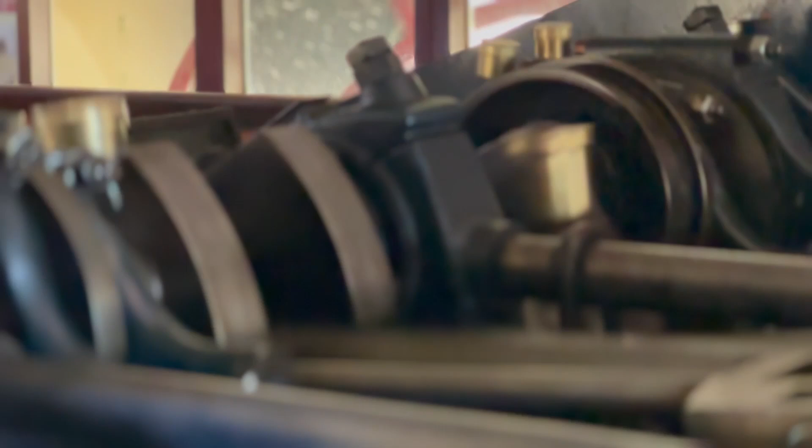Following on from the first part, I'm going to continue installing that center console. I've got the carpet kits, door cards, and we'll probably hang some panels as well. So we'll get into it.

Alright, I've installed and marked it out. I've got the bracket at the rear and the front. I've got the Bang Shift Aeroflow installed.

Now I've been debating with this, spoke to a few people, and they're like, why don't you just get a normal T-bar auto from the V8? Well, I wanted to do something different. It's all about trying some new things along the way.

Some people have said Aeroflow are called 'Aerofail' because they're not good, and you don't want to stuff around with your transmission. I've since found out that if it's in the wrong gear, you can stuff your whole transmission by having a ratchet that isn't popping it into gear accurately.

But I think as long as you set that up the correct way - these things have obviously, you know, they're selling, people are using them. They've got the right connector for the Turbo 350, which is going to pop it into gear accurately. So as long as you go through the gears properly beforehand, before you start it up and chuck it in gear, I don't see how it can cause too much of an issue.

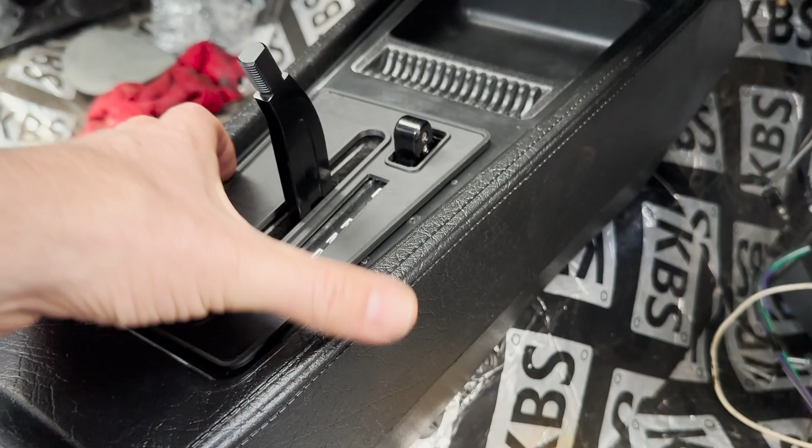If I can stick that down, that'll provide that reverse lockout switch to pop in. You can buy these extended billeted arms for these, so they're another 30 mil. If I get that and put that in, that will give me that extra access, because I can't get it sitting any higher than this - there's a spring underneath and it's just hitting the underside of this console.

So it's going to be a bit of a short shift, but being an auto, it's not the end of the world, I don't mind. A lot of the sports cars that you get end up getting a short shift put in anyway. So I think it looks good, I'm happy with it, and it's going to have to do.

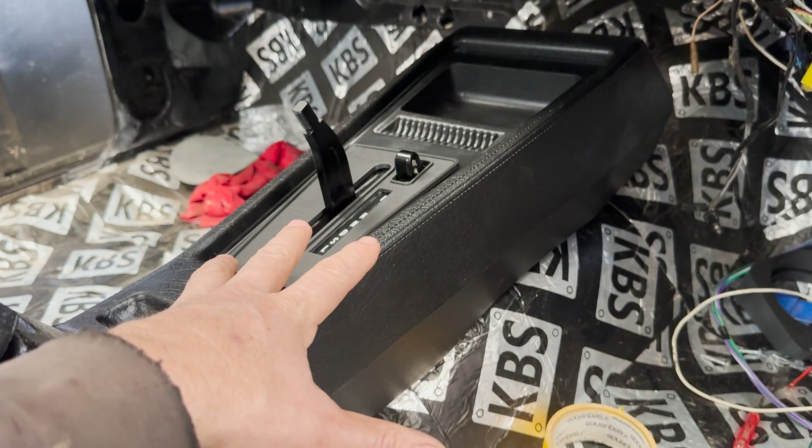So once that's in, I've got the carpet kit over there. Once it's in, the underlay and the carpet's going to lift it up slightly a bit as well. So it's going to be pretty short, but I think it'll be fine.

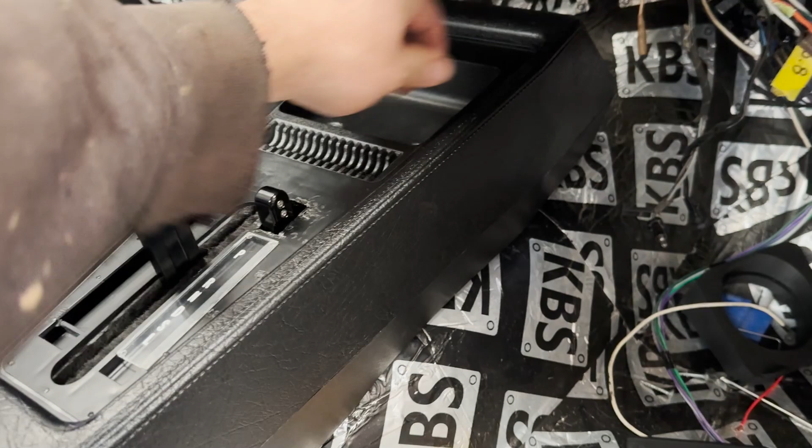So really I've just got to take this off now. It's been a bit of an arse of a job, actually. I've got to take that off, line it up, and then I'm going to have to tack weld all the brackets in and make sure it's all lined up correctly, because once it's tacked in, that's it.

So I'll take it off, mark it out. I'll have to grind some of this butyl rubber back, and then we'll tack it in.

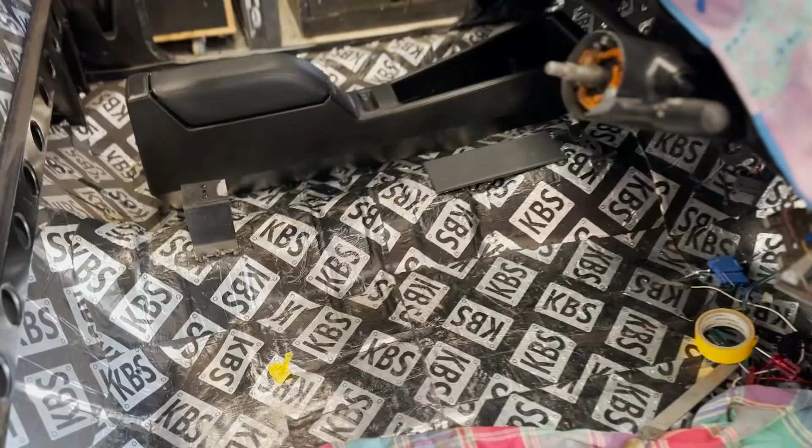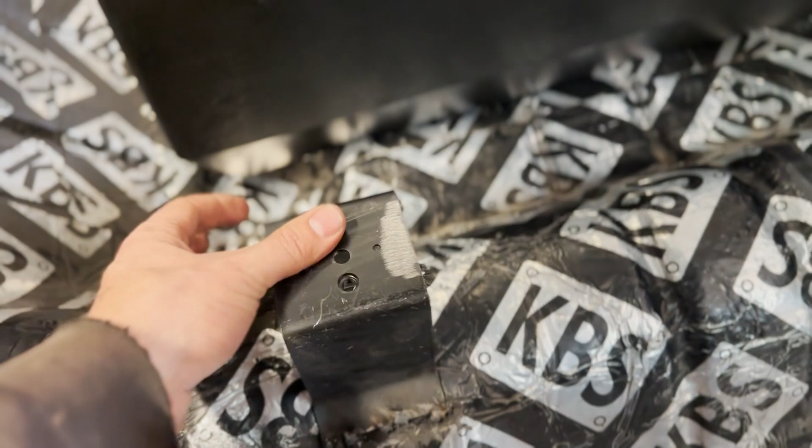Alright, bit of an update. So I've got the mounting bracket welded in the rear and at the front. It was really hard, a bit of an oversight - it was hard to get a good weld on those, so that's why they're a bit shit, but it's holding because of the butyl rubber. So if you're going to do that, don't put your butyl rubber on before you weld.

So anyway, the bracket that I ended up having is basically a sheet of steel - that's the clearance that I needed. It was literally just creating a bit of a flat bridge across that depression there, allowing clearance for the shifter on the console, and everything sort of lines up.

This cable's going to be interesting, going down there - it's going to be pretty tight. It'll fit. This plate is going to need some reinforcement down here, just like a little piece of vertical steel to drop down, just so it doesn't have any flex in it.

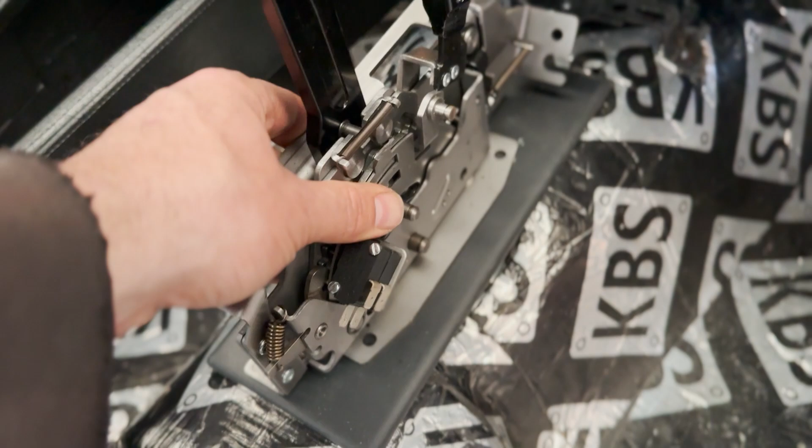And then really I'll just do a bit of a tack, tack that in, and that'll be enough. Then it's just a matter of alignment. So I'm pretty happy with the console alignment, it's got some wiggle room both back and forth, side to side there. This plate is pretty much where it's going to be as well. So I'm just going to fabricate up these side bits, and that'll be this job done. I'll be happy to get this over and done with.

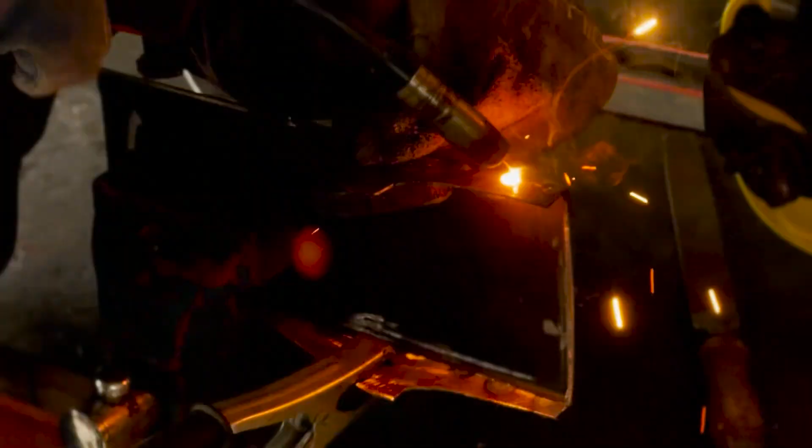All right, I've got that tacked in. I've got the sides tacked in, just seated it, and I'm pretty happy with that. I don't know exactly where that final position is going to be, but the plan was I'm going to riv nut through here and screw that directly on with Allen bolts. I think that should be enough, there's 3 there. So I'm pretty happy with that. The height is good on the console. Check that, these are all obviously in.

So really, all that's left now is just to tack those corners in. Then I can start to think about the carpet, which I have.

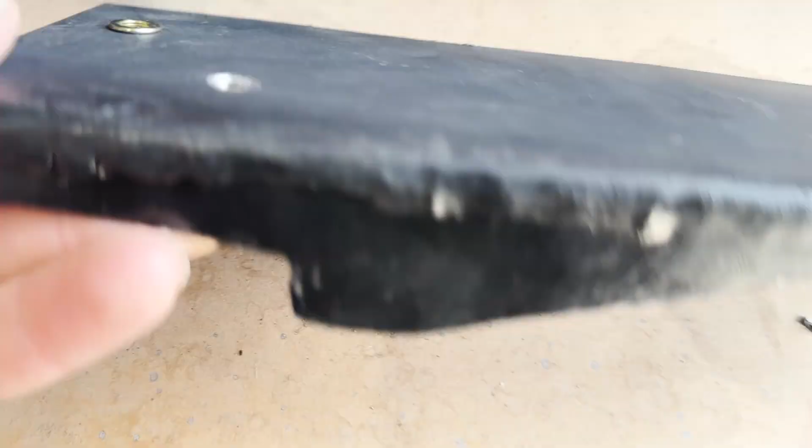All right, so off camera I've just welded those on, pretty rough. Got a riv nut, that's an M6 riv nut. Just got those 3 marked out. It's pretty good clearance underneath. And so I was just looking at getting the right bolts, and I've managed to find 3 of these.

I'll tell you what, this is my old grandfather's toolbox. And if you ever have the opportunity to get an old toolbox that someone's had for years and years, grab it. I got this when he passed away, I inherited this toolbox, and it has probably 40 years of little bits and bobs that he's come across, that he needed in all his shed work and everyday life. He's probably been dead 20 years, and I reckon he's saved me every year since, just for finding something.

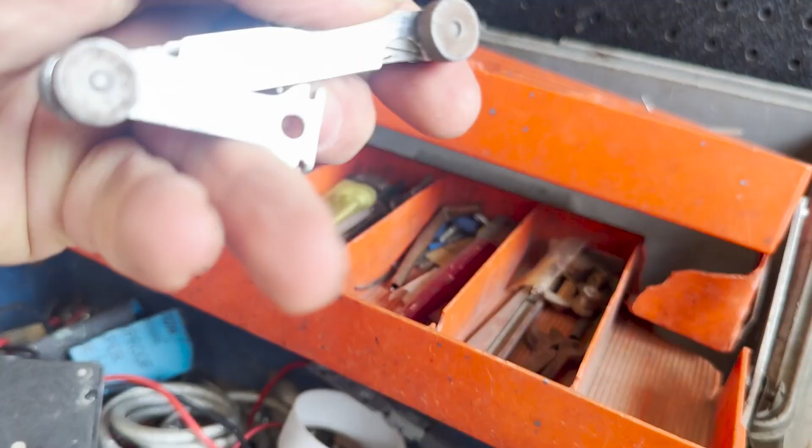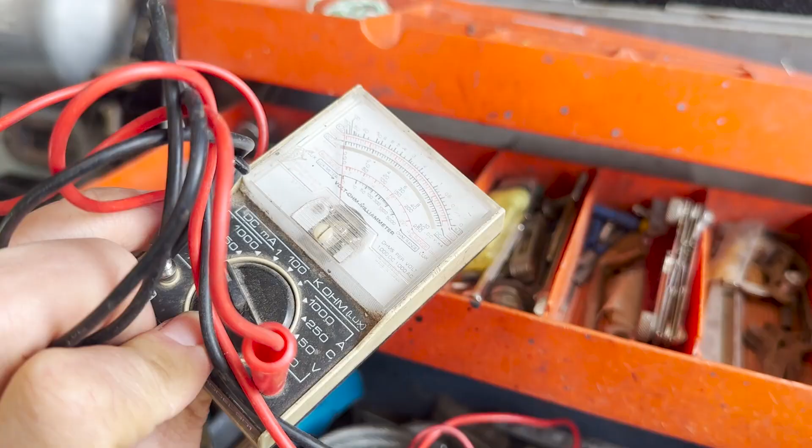It's got little things like this little tool, some German tool, the old school guys would know that, I don't know what it is. There's a little copper tube, he's obviously used that for something. He needs a lighter to heat something up, needs some wire. This isn't a hole punch or anything, it's off something totally different, but it's actually beautiful to punch holes in leather or mark out some tin. Don't know what that is, but I'm sure I could find a use for it if I stare at it long enough. Like this, just old school, but it still works.

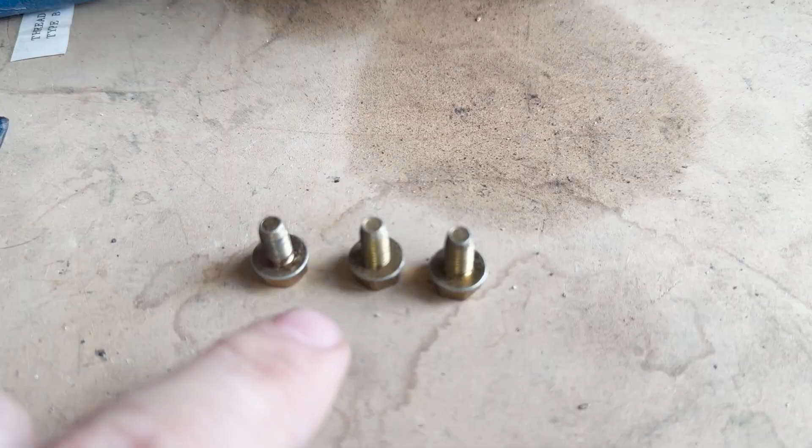He's probably getting a little bit carried away with this, but there's little tap threads, every single conceivable thing that's got him out of trouble before, he's popped in here, and I've just been reaping the benefits. I'm not too sure what's in there, but little nuts, little bolts, and he was a great craftsman, my old pa, and yeah, I was actually privileged to have this toolbox. So if you ever have an opportunity to grab one, because I can guarantee it'll save you every single time. In this case, the old man's nut and bolt toolbox has saved me.

So I've got 3 of them, I just need to find one more, and I'm struggling to find it. I reckon it'll be in there somewhere, and then I'll have a matching set. So anyway, I'm going to get the rest of these done, and let's install it.

All right, so she's all riv nutted, bolted in, both sides. Managed to find a different one in the end, couldn't find all 4 of the same bolts. Test fit it with the console. Heights are good and position's good, and the clearance is good at the top, so it's all good to go.

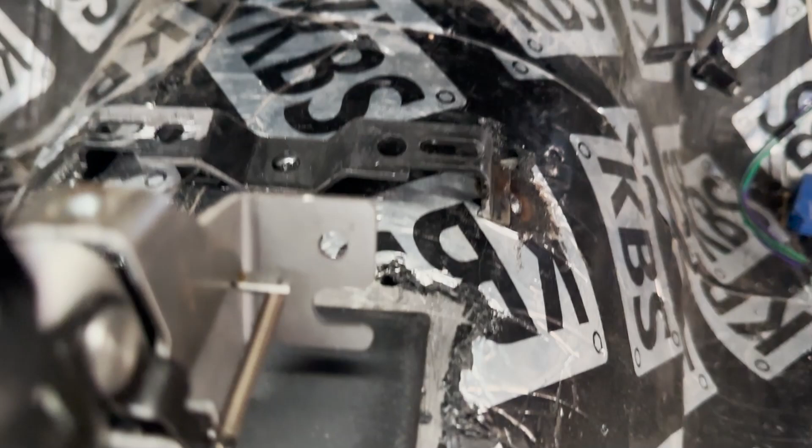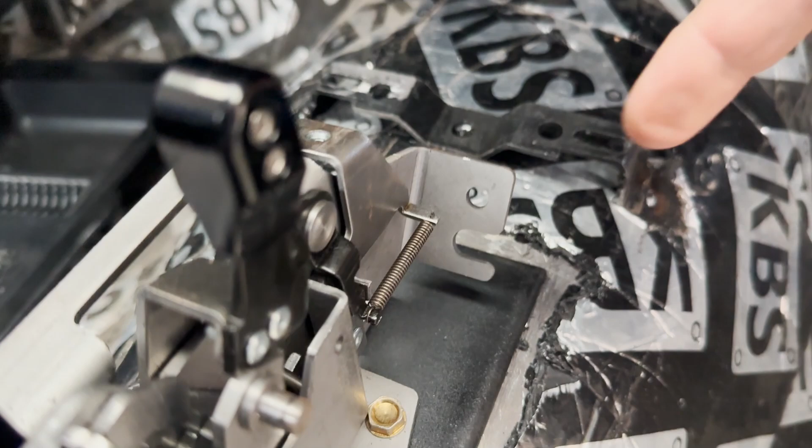So the next stage before I tack it in is to get this cable hole sorted. You can see it's pointing down, getting pretty close to that mounting bracket, but I think you can bend it slightly. Not a huge vicious bend, but you can certainly bend it a little bit. It is a flexible cable, so I'll get the documentation out on that in a bit, and we'll see what we're dealing with.

All right, so that's with the console in place. You can see the 2 holes line up there in the mount. Got a fair bit of sliding room there, back and forth, but the console really dictates, based on this shape here, and also the back where it hits there, where it should sit.

So even though you've got a bit of room to move, the body will show you where to put it. I've got my 3D printed case there that I'm just going to put over like that. That just really finishes it off.

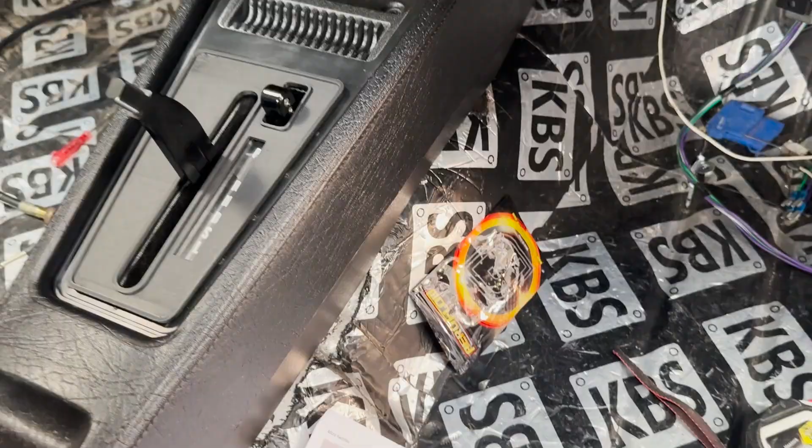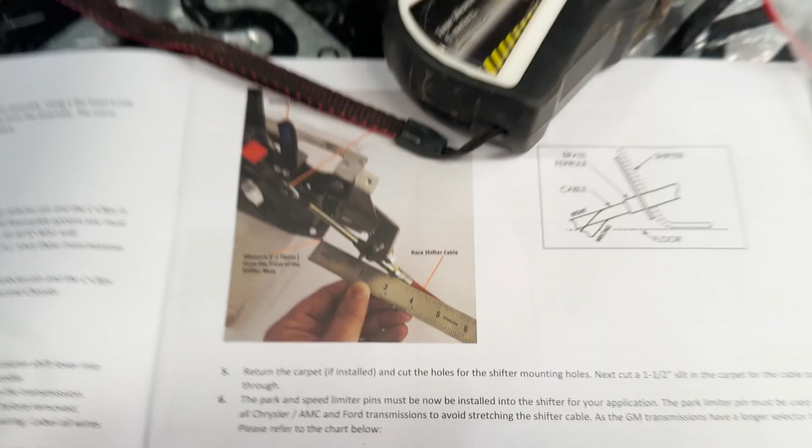Looks factory. So anyway, the documentation says you've got to drill a 1.5 inch diameter hole for the shifter cable, 3 inches from the base of the shifter. You can sort of see it there. So basically about 76 mil.

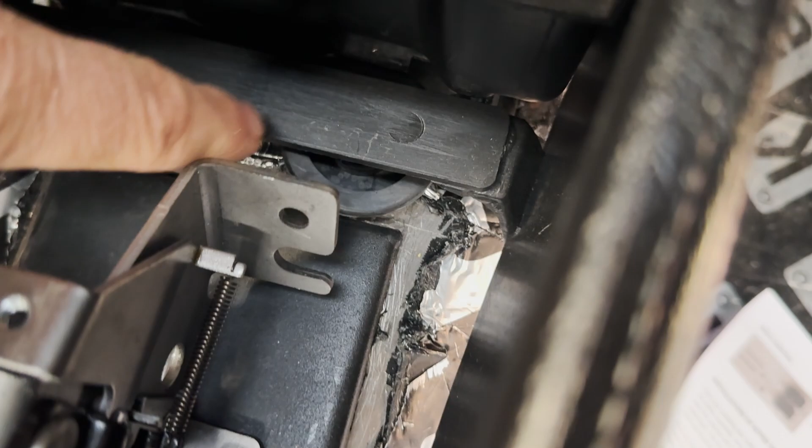And if I take this off, I'll show you how close we're talking. So you can see I've got a little grommet. It comes with this grommet, or bung, that'll allow you to put the cable in. And that's the cable there. It's a pretty hefty thing, but I guess it has to be. And that's the part that's going to be sitting on our shifter with this little clamp here.

So we've got this plastic bracket, stabilizing bracket on the console that's covering that, unfortunately. And that's pretty reasonably crucial, I'd imagine, to keep the whole thing structurally stable. Although it's not going to be holding a lot of weight, it's still nice to keep those structural bits if you can.

It is plastic though, so I think I can melt a little section out here to just get that clearance. I think that should be right, but it's really, really tight. Hang on, I'll show you with it removed.

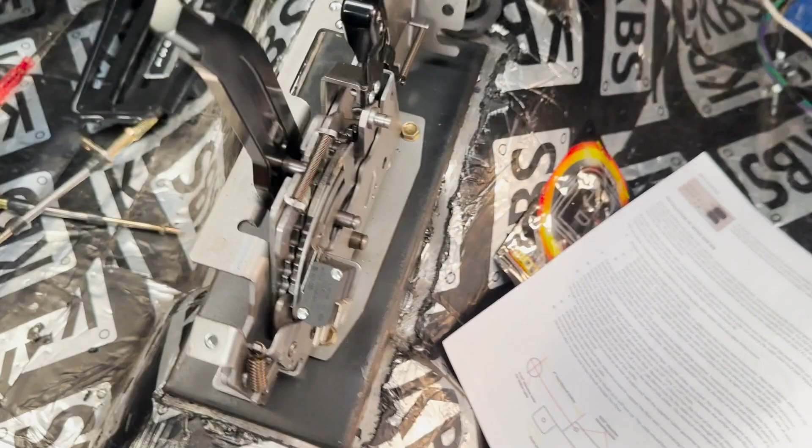All right, so here it is. You can sort of see that hole. It sort of lines up, but it is very, very tight.

It says 3 inches from the front of that plate there to where the hole needs to be, and that's 76 mil. So you can see I'm actually bang on, almost bang on. So I think it's going to work. I had to tack that in to get the console position in order to get that.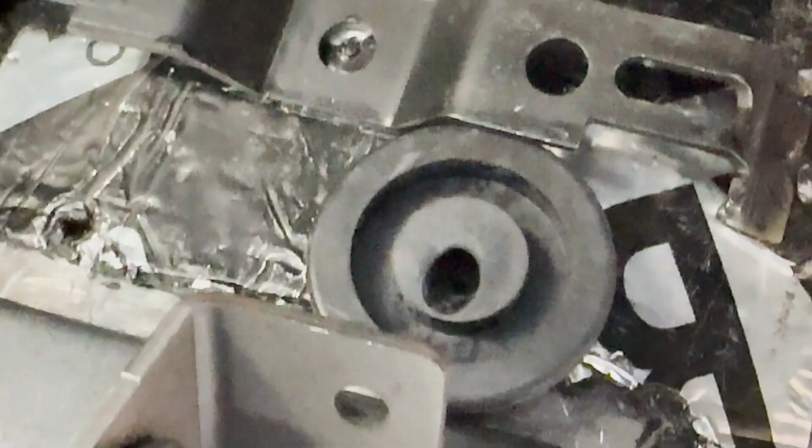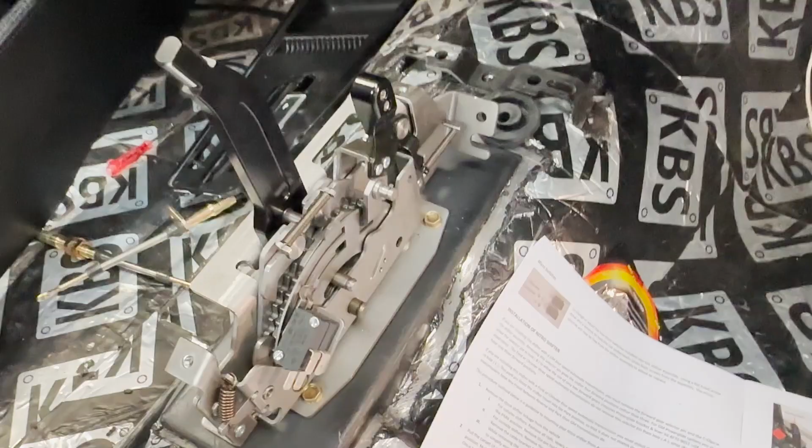She's been a fiddly job, but that's the bung there that needs to go in, and it's a 1.5 inch hole to drill. I've got the drill over there. I hate drilling big holes in cars, especially the floor. Anyway, I think really all that's left is to just drill the bloody thing and get it in. Then we can move forward with this, because as you know, it's been ages on this console. So I'm just going to go for it, drill it, and start getting this cable in.

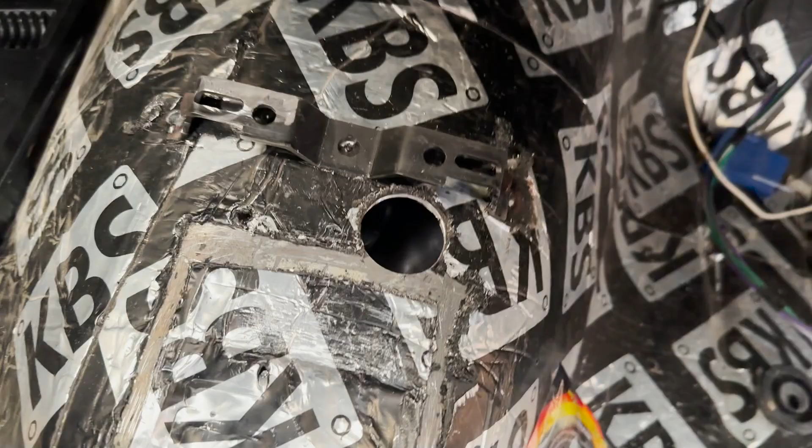All right, bit of documentation on this shifter. So I've got the bung in there. It goes on that bottom hole actually, so I reckon that's pretty good. It's actually looking pretty well placed.

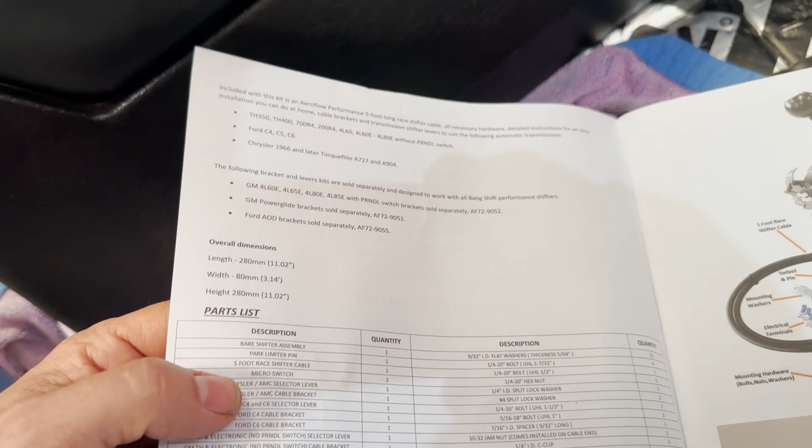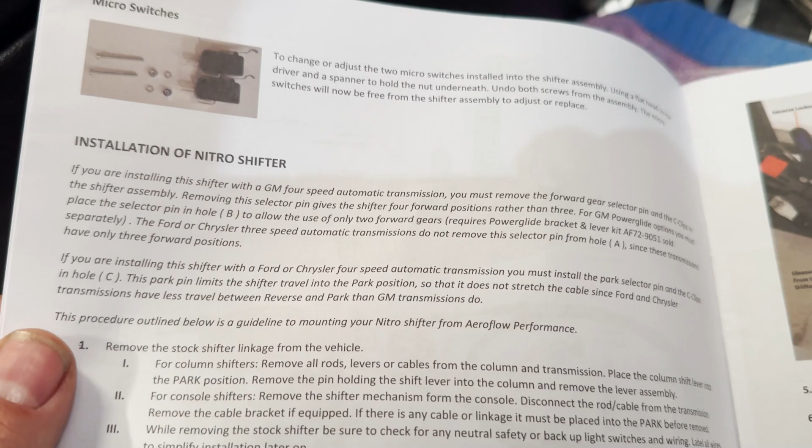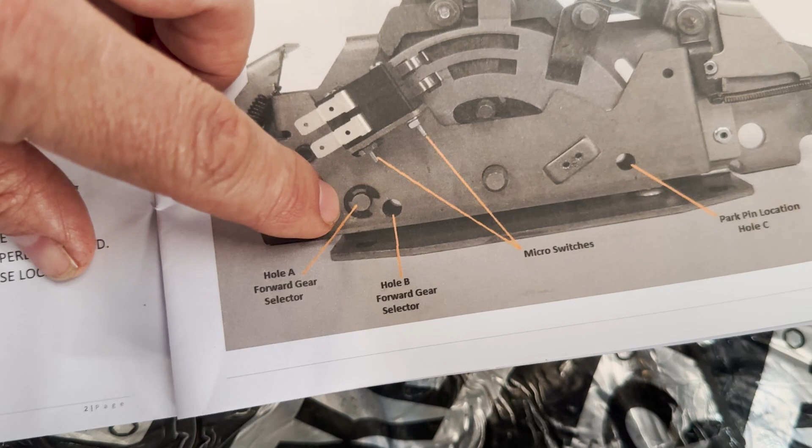So with these shifters, there are some things you need to do if you have different shifters, because it's a one kit fits all sort of thing. So basically, if you've got the GM 4-speed, you have to remove the forward gear selector pin, which is there, and put it in there, I think, or just remove it. And then if you've got Ford or Chrysler, you need to put the parking pin in there.

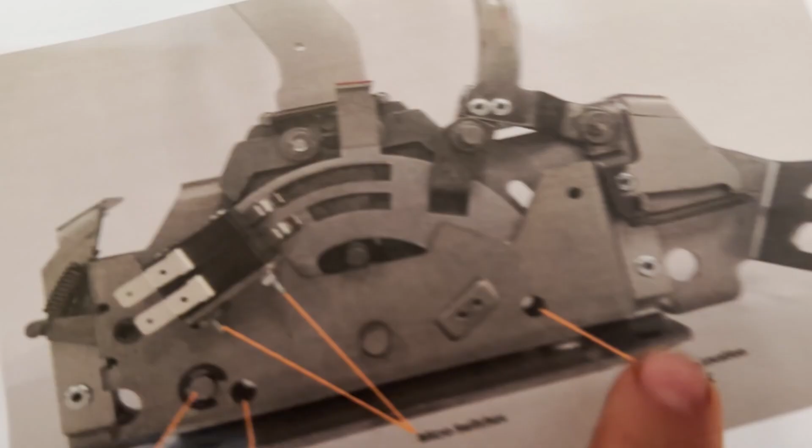So they provide you all these little goods in here. The parking pin is just there. They give you a C-clip with it. So you've got to put it in there because the GM has a slightly longer throw in the cable.

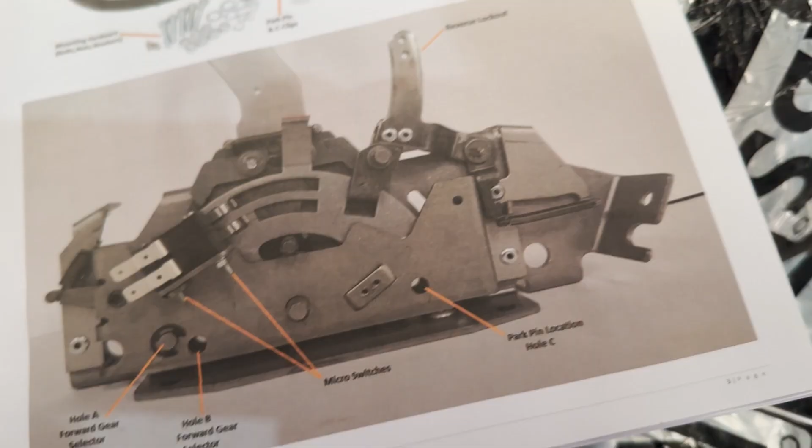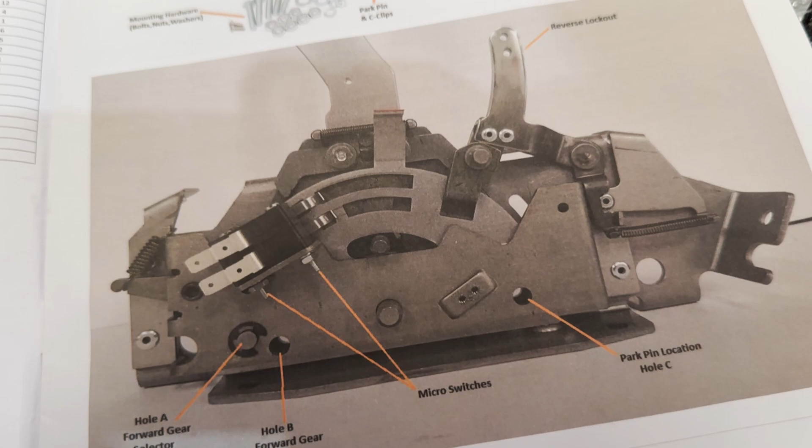So if you've got a 3-speed Turbo 350 like I have, then from what I can see here, you don't have to do anything, you just leave it. You have to ratchet twice to get from reverse to park because it is a longer distance. So if you only ratchet once, you won't be in park, and obviously the car will roll. That's not ideal, but that's just the way it is, and it does say it in the documentation.

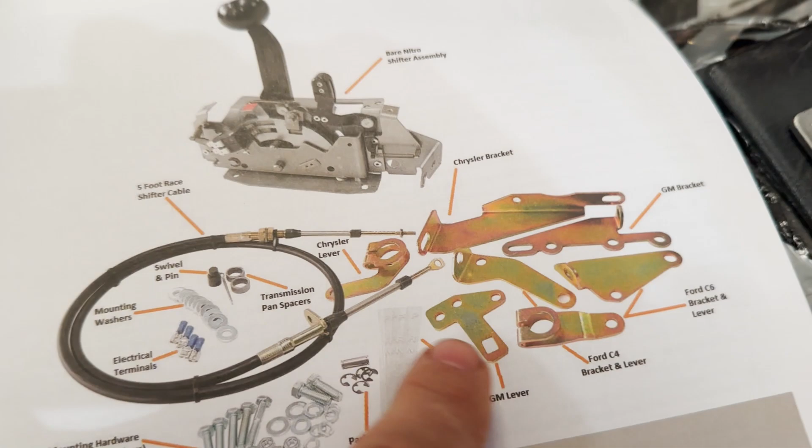So I'm going to leave it, and I'm just going to thread the cable in through the front there, see if we can get some fitment and testing it, and then I'll try and get underneath, because they give you all these brackets, and the one I want is the GM bracket and the GM lever for the Turbo 350. It's got that on the next page, but for now I'll just see if I can fit the cable.

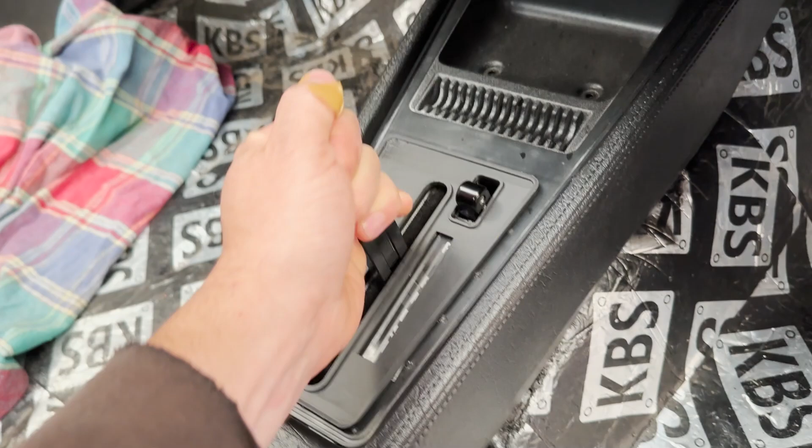So it's now welded in off camera, and I just did a test fit, so happy with that. Reverse lockout, it's working. And clearance, and park. She's all locked in.

mechanism that's going to talk to that little selector, the LED selector, which I've got to buy as well, and hook that in, but that can be at a later stage.

I just want to get this carpet in, the last seat, and then the carpet in. Before I do that, I need to just thread the cable. So I'm going to take all this apart now and tackle the cable, which looks to be a little bit of a nightmare because of the length. You have to sort of feed it around the transmission to get it lined up.

So it's in park, that's what it says, push it all the way to park, so we know it's in park. And when I put the cable on, we'll push the transmission into park as well. Then it's a matter of lining everything up, putting the bracket on for the GM Turbo 350, and that's it, bolt it up.

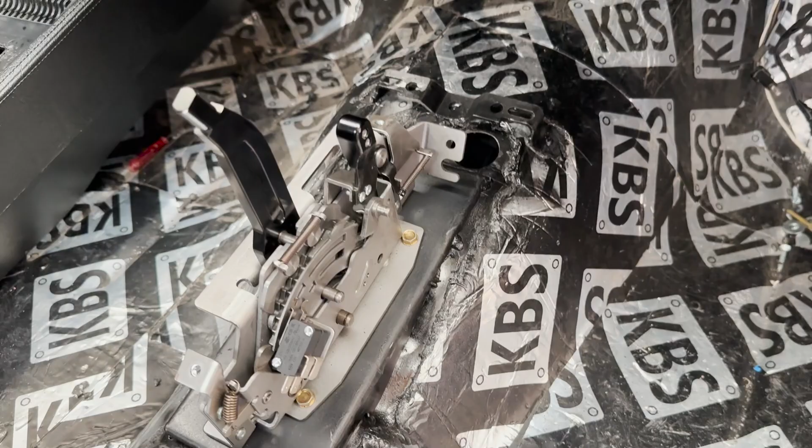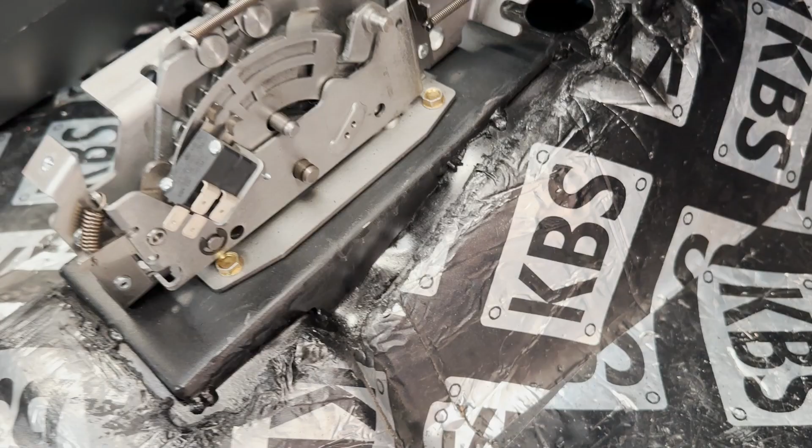So here we go. Oh, just quickly, I've just tack welded it in. Don't look at my welds too much. I didn't want to weld it in too heftily, didn't want to run beads or anything like that, so I've just done some reasonably hefty welds in the corners, on the sides. That thing's not going anywhere.

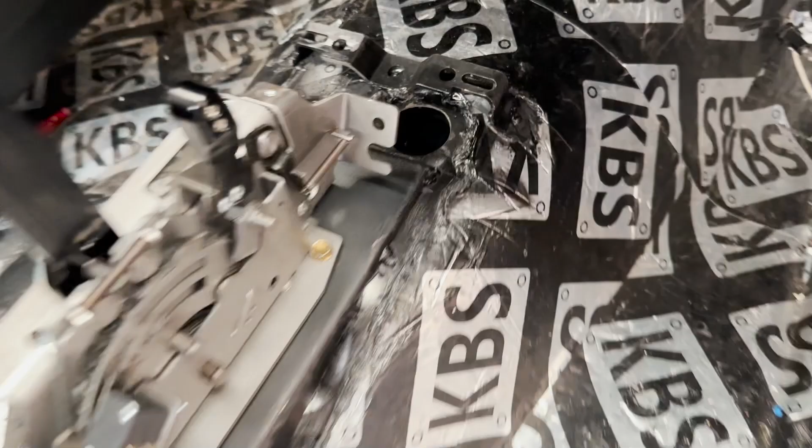For some reason you did need to remove it, but it's not going to be the end of the world just to grind off those welds. So everything's ready to go, it's lined up, as I said. The hole's there. Now I just need to get this cable, thread it in, and figure out how to position it so that I can hook it up.

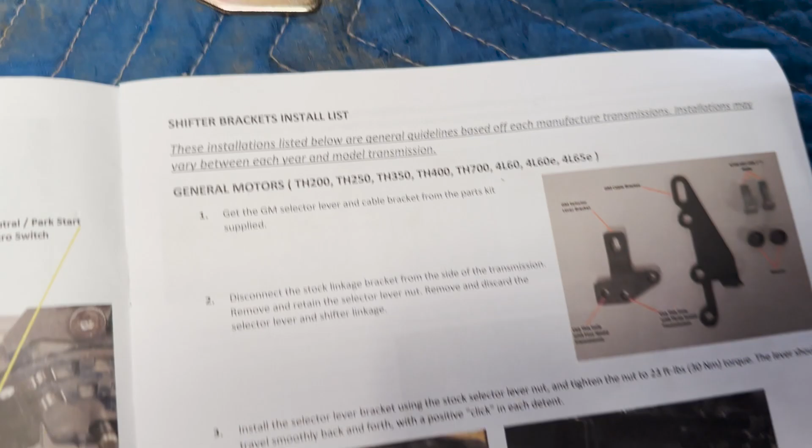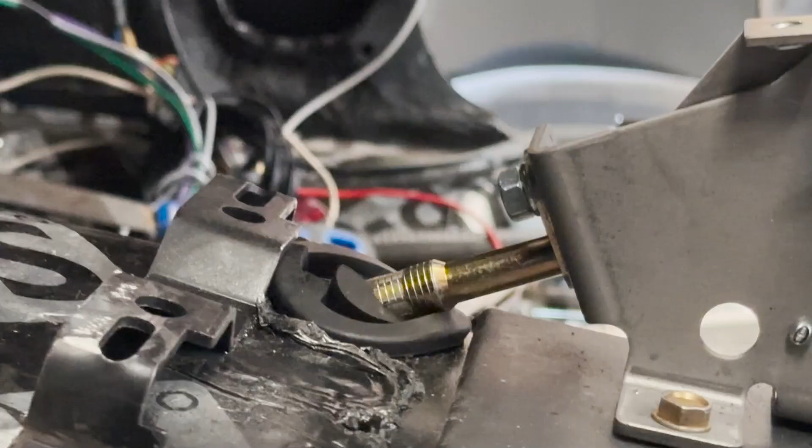All right, so I've managed to get that in. The bung needs a little bit of massaging, but that cable is routed just down and then it's gone around. You can sort of see it sitting there. So I'll just tuck it back onto that. You can see the sump for the gearbox.

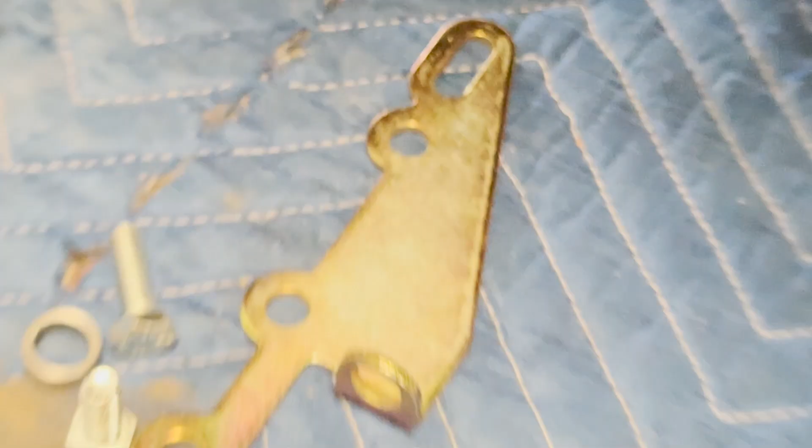General Motors for all those models there, so mine's in that range. These are the brackets and the bolts and spacers, which I've got here. You can see there's the linkage there, where I've got to hang that. And then you've got to take off two of the sump bolts and put the spacers there for this bracket. The cable then routes there.

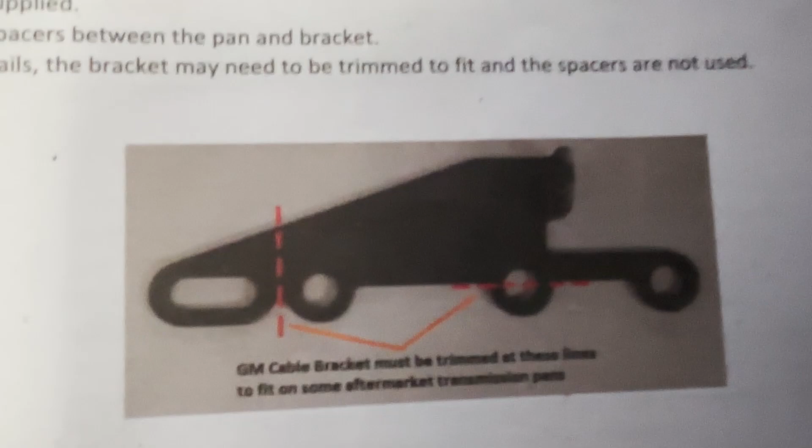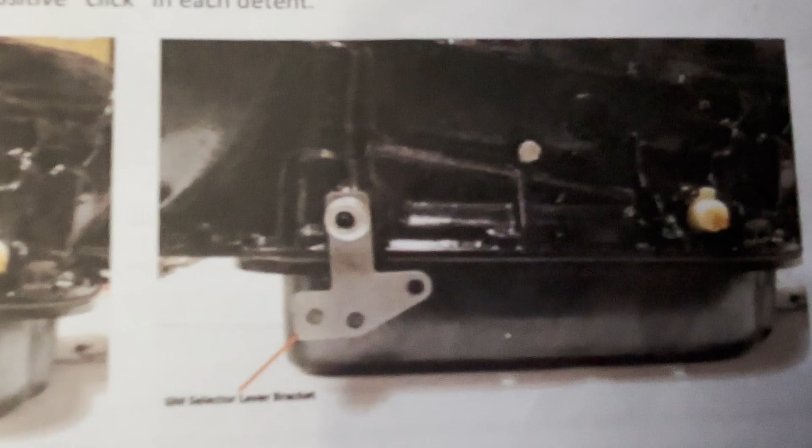So I'll start by putting this one on. I don't actually have a nut for that, I'm hoping they provide one. So I'll just do that now. It's really tight under here, so I probably won't film it. I'll just do it and then show you.

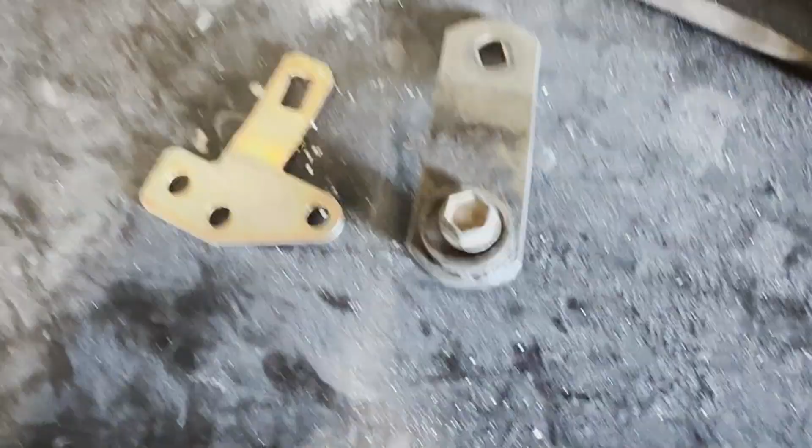All right, so this is the bang shift gear selector bracket for the GM. Now, I'm pretty sure the 3-speed goes directly below. This is the original that came off it, so you can see the difference in the thickness of the metal there.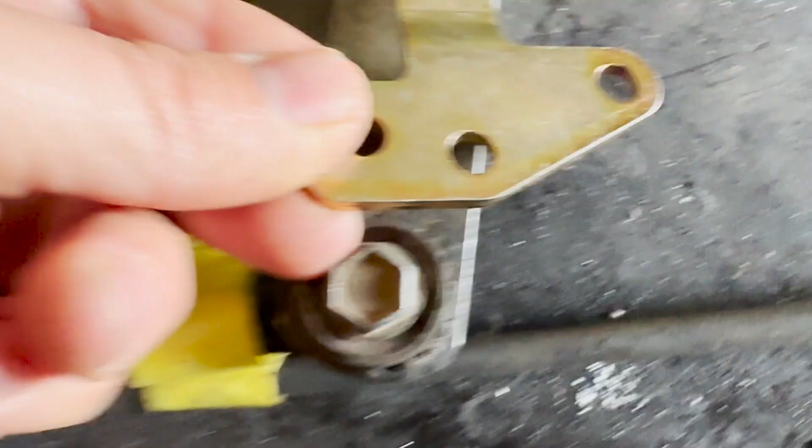It was on the cheaper end of the ratchets, even though it was still $500, it wasn't $750 for a B&M. So I don't know if that would fix it. But yeah, I was in two minds whether to actually use this original bracket and just cut it, find that hole, cut it. But it's on a slightly different taper, on an angle, so that hole would sort of be - if I line them up, that hole would be off to the side. So I thought, you know what, don't make my life any harder than it needs to be.

I'd love to use that because it's got a bigger angle on how it's sitting out, whereas this one's a tiny bit tight on the pan because I've got an enlarged sump pan on the gearbox. I've had to bash that out a little bit to try and get clearance. So I'm just going to use the one that came with the packaging because it's easier, it's designed to have that exact angle, and I don't want to stuff around with anything that could get the wrong angle going with the ratchet. So I'll use this, even though I'm not completely happy with the fitment. We'll just install it and go from there.

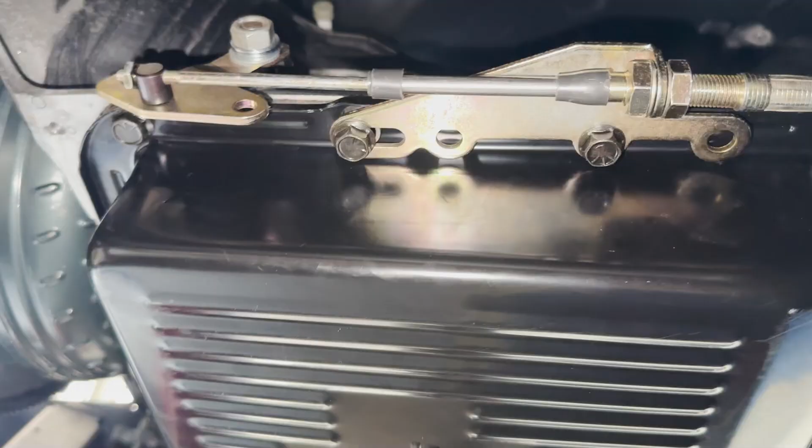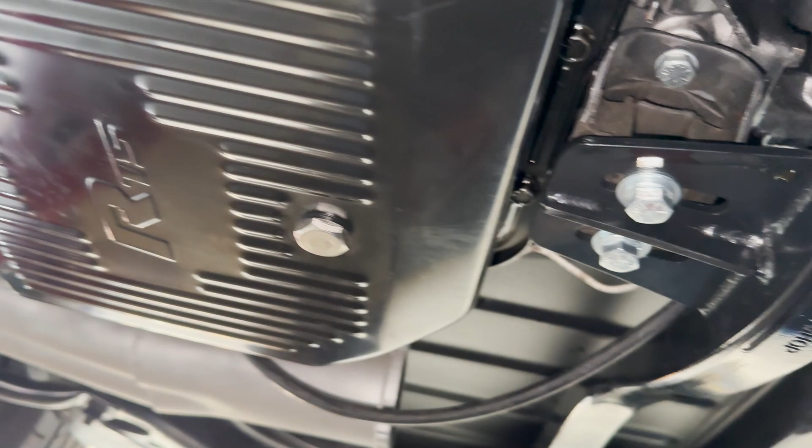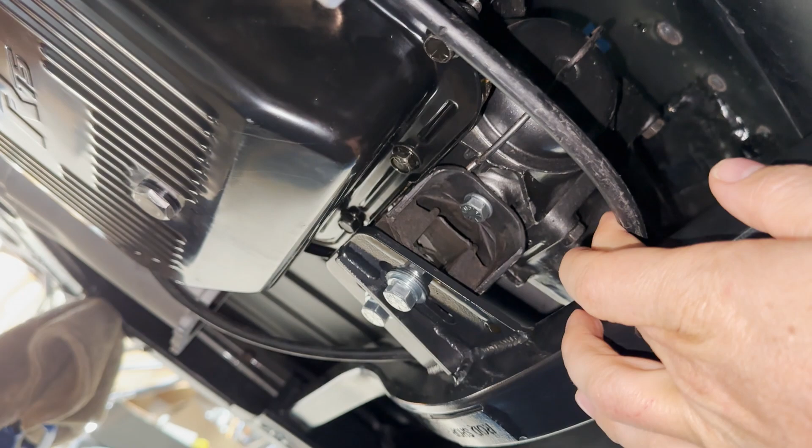All right, so we'll fast forward. I've managed to install it with the new brackets. The cable's routed, sort of twisted around. Probably have to put some heat guard on that near the exhaust, but I could pull it back a little bit, bring it up, so I could maybe cable tie it around there. But the play in that front gear selector bracket, once I tighten it up, it's actually all right, really secure. So it's a good little system. I take it back, it's very solid.

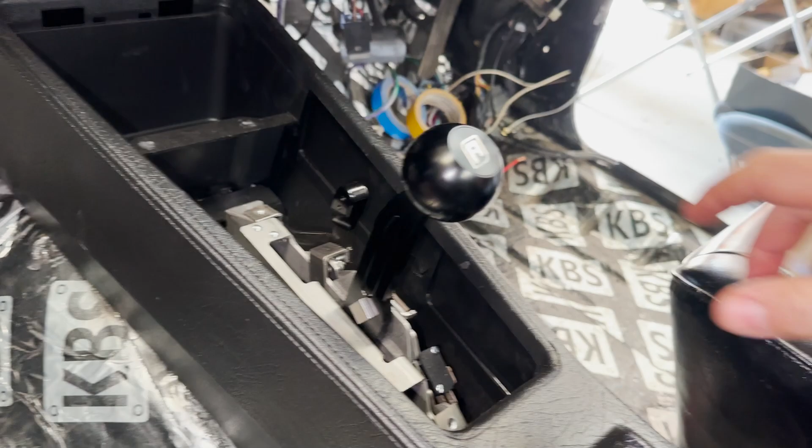So I've basically gone through and tested it, and now I've tightened it all up and installed it. Got the seat in there, just positioning it. She's going to be definitely low, but I tested it before, and being an auto, it's fine. So that's in park at the moment, park, 1, 2, 3, 4, 5, up 1, 2, 3, park.

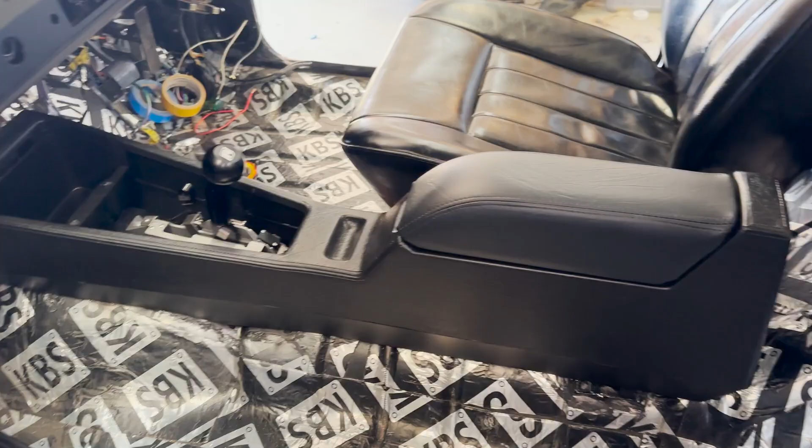Before I actually fire it up and drive it, I'll obviously run it past another person to see, probably Tim if he's around, just to see if it's all good and lined up. But from what I can see and feel, I've gone through the documentation saying put it in low, put it in park, tighten her up, and the clearance for the seat's fine as well. So really it's just a matter of bolting that console down, putting the plate on, and that'll be it. But I won't do that because I've got to go to the carpet now. So before I can do the carpet, I've just got to do this one last seat, get the position for that, and then it's carpet time.

All right, so here are the door cards that I ordered off Cool Trim. Now that's not the standard pattern, but that's the one that came with the kit. It's about $1,250 for that kit, and that's the pattern that comes with it. I didn't mind it, it's sort of a little bit like the Monaro pattern, I think, from memory.

Carpet is rolled up there, so that's just a molded carpet loop pile. And then I've got the underlay all packed away here. You've got the mats and, sorry, not headrests, kick panels, handbrake cover, a little bit more underlay. In the other door cards, there's also the roof liner and the other door card.

So obviously you've got to install it yourself, but if you're after an interior package for your ute, Cool Trim, I'm not promoting it or anything, I just found on eBay he was the most affordable option out there. Anyone that's restored a car before knows how expensive an interior can be. If you want real flash interior, custom made, real leather, then go to a motor trimmer and get it done professionally, but expect a bill between $5,000 and $7,000, depending on how hard you go. But if you just want it done similar to how it looked rolling out of the factory, then Cool Trim packages, just do it yourself.

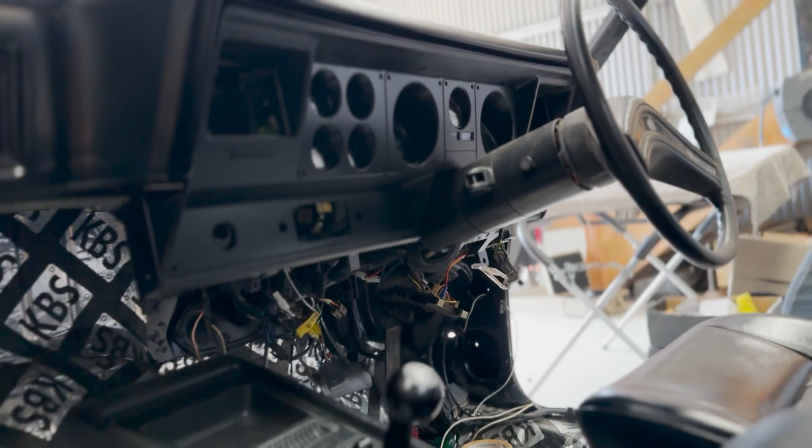I'm really happy with that B&M shift and the way it's fitted into that original console. It was a lot of work, but I think it's paid off. The combination of the two looks mean.

Just got to get that steering wheel now. Obviously, I'm not happy with these seats. As everyone knows, I restored these back from the dead, and they let the whole interior down because of that tacky, shiny vinyl spray. But you just got to get over the line, so for now that's going to be enough. Once I'm finished, I might save up and get them completely reskinned properly.

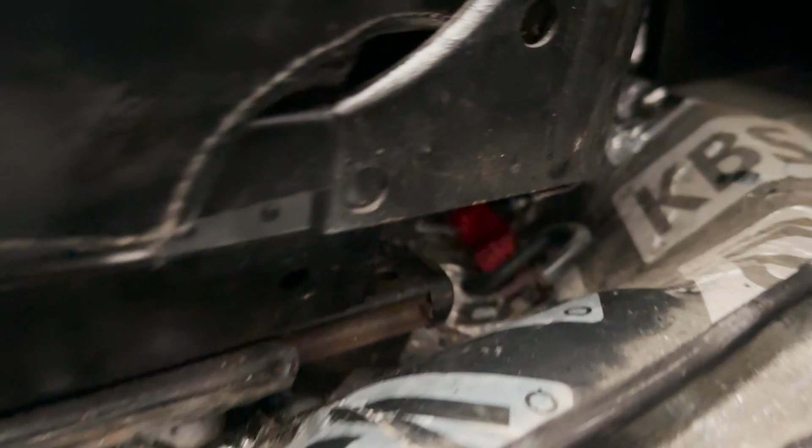I had to do a fair bit of adjustment on these. That's the second seat I've done. I actually had to ratchet strap the rear of these runners inwards because it was about 10 mil out at the rear, but they're all lined up now and I'm happy with that. Even though they're around the other way, there's still room to get your hand down to adjust. Someone told me there wasn't going to be enough room, but there's miles of room there. I'm not too sure, there must have been a different seat. Anyway, one step closer.

I'd like to get the carpet on now, but as you can hear, I'm a bit crook, so I should be resting. But I'll just come out and do a bit more work on this. That'll be the next episode, I think.

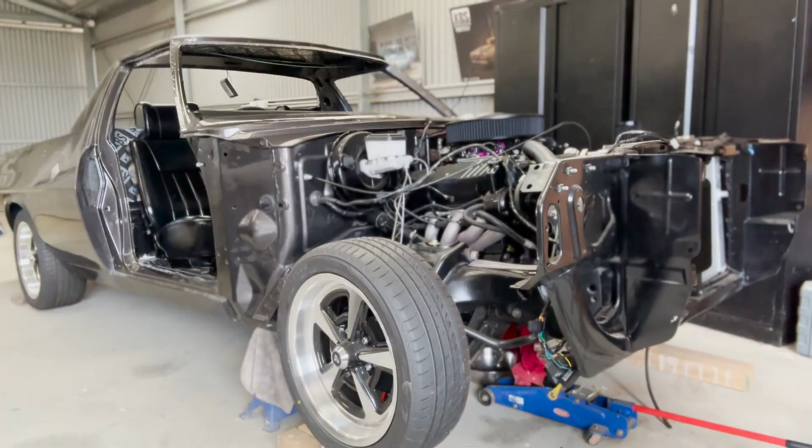All right, so that's it for this episode. Just a quick update on the WB tail lights. I know a few people have asked me. The production in the ABS and ASA plastic is a lot harder than the original prototyping, so I've been working at that and trying to streamline how long it takes to make a set, because otherwise it's obviously going to take forever. It won't be viable to make.

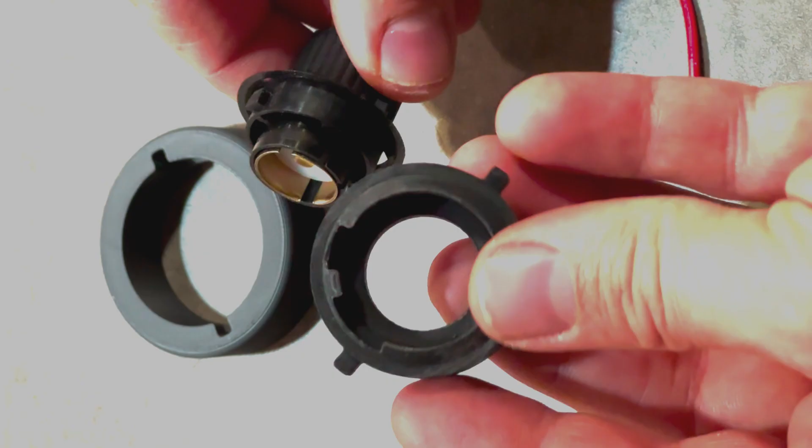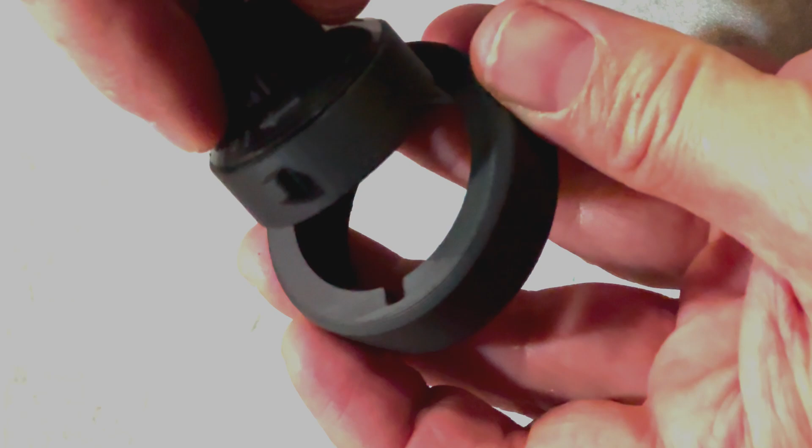Along the way I've also had a chat to a few people, so I've redesigned the light fittings for each of the pods so they can accept a modern Narva bayonet fitting. We'll do away with the old ones, but the way I'm designing it, you'll have an option to do either. If you want to keep it stock, you can. If you want to have a bayonet, you can. So we're getting real close now. Carpet will hopefully be in shortly, I'll get that on the next episode.

Then I'm going to get Tim back over. He's offered to help me hang the doors and hang the guards, and that will be the final assembly of this ute. Really, the only thing holding that up was putting the seats in, getting the carpet and the B&M shift in. Now that I've got access into that area, I don't have to bang around with the doors there, so I was a little bit worried I was going to scratch the doors. Hanging the doors and guards is a pretty arduous process, you've got to be real careful. So it's going to be a fingers crossed day, and just heaps of tape. Take your time, and hopefully we'll get there with no dings and scratches.

I'm looking to get an exhaust, I'm around the Bendigo area. If anyone knows of an exhaust maker, I want a twin exhaust on this, I'm up for suggestions on mufflers. I was originally going to go twin 3-inch all the way through, but someone said don't bother doing that, just 2.5 is more than enough. So I'm after anyone that's got a good muffler they know has got a deep throaty note for this 355 stroker, but obviously you're not going to be just blowing your eardrums out on the highway. It's a real fine line between that.